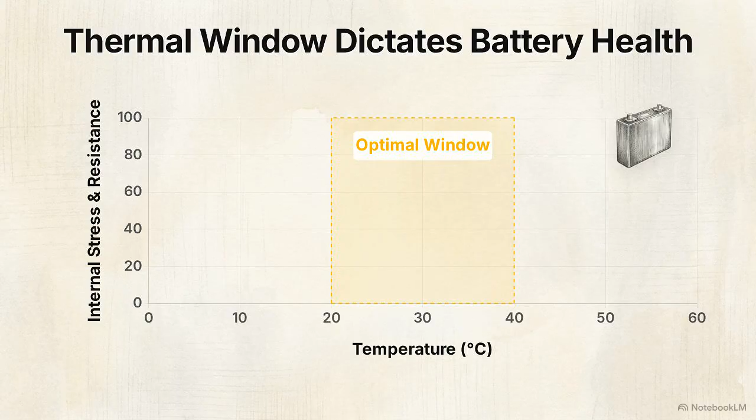Lithium-ion cells operate reliably within a specific thermal window, between 20 and 40 degrees Celsius. Temperatures below this range spike internal resistance, while temperatures above it initiate the breakdown of internal chemistry.

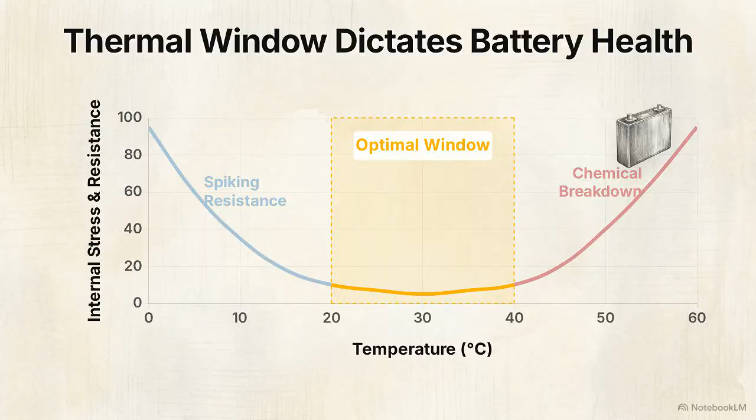Strict thermal uniformity is equally critical. The temperature difference between the hottest and coldest regions of the module, or delta T max, must stay below 5 degrees Celsius to prevent cells from aging at different rates and creating pack-level imbalances.

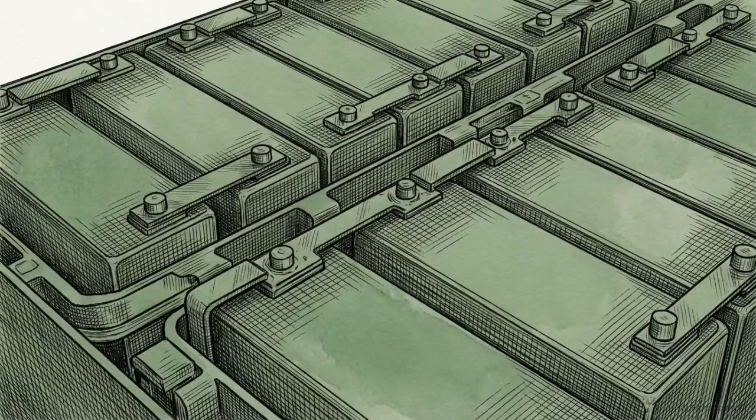Pushing a cell beyond these boundaries triggers immediate degradation. High heat accelerates side reactions that permanently thicken the solid electrolyte interface layer on the anode, stripping the battery of its total charge capacity. Left unchecked, this heat accumulation initiates a self-accelerating exothermic reaction.

The internal temperature continues to climb until the polymer separator melts, causing the cell to violently vent flammable gas in a thermal runaway. High-rate fast-charging protocols force massive amounts of current into the cell in minutes.

This generates a thermal load that violates these operational margins, creating a bottleneck that standard single-mode cooling systems cannot resolve.

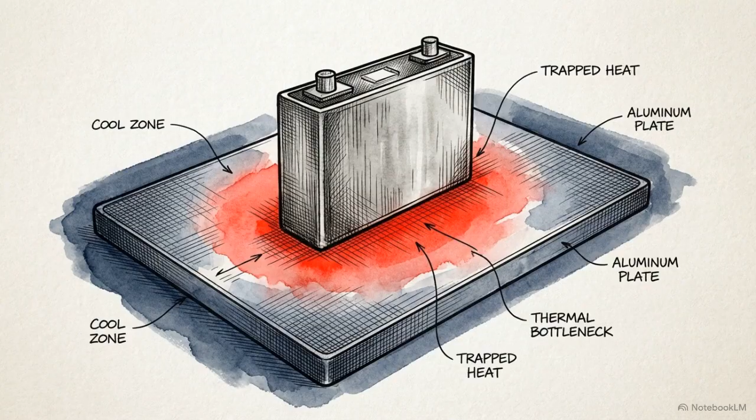Using the Bernardi model, we isolate thermal stressors during 5C discharge. First is irreversible joule heating. As current meets internal resistance, electrical energy converts into a continuous thermal load. Second is reversible entropic heat, produced by chemical reactions, which fluctuates with the state of charge.

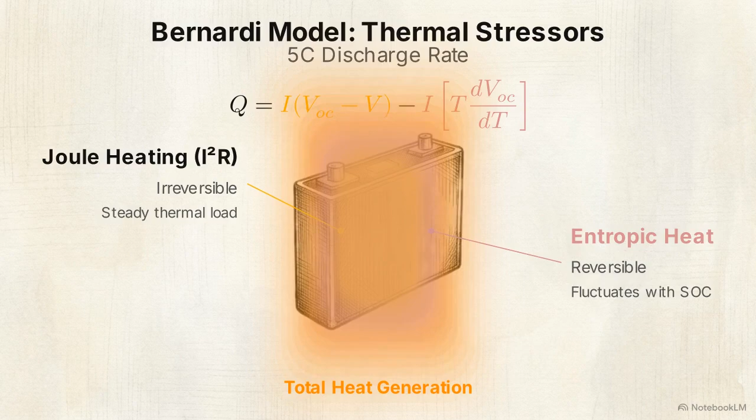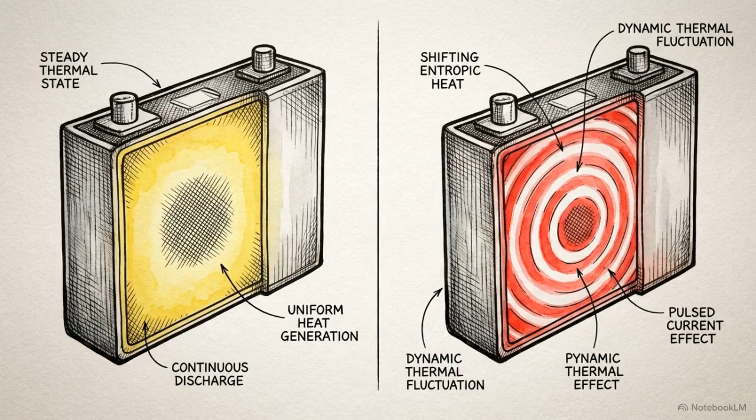Accurately quantifying both the steady ohmic heat and the shifting entropic heat is the required first step before engineering a conjugate heat transfer system capable of dissipating them.

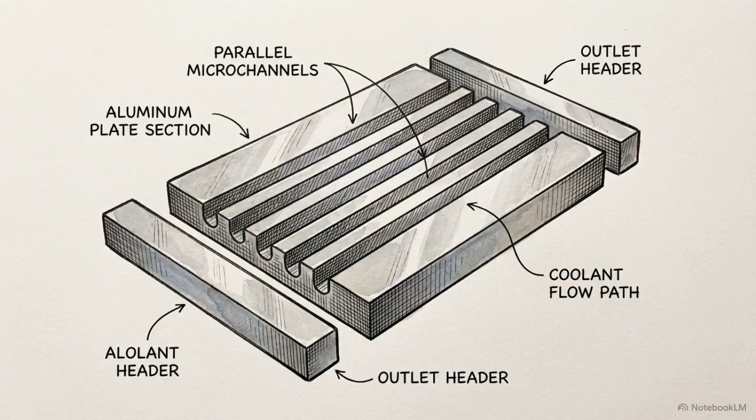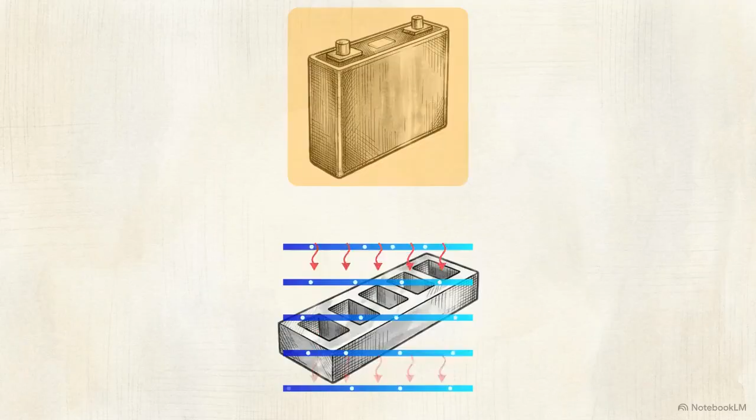Our baseline configuration, Design 1, is an industry-standard monolithic aluminum cold plate featuring 5 internal microchannels. It operates via forced convection. A water glycol coolant circulates through the channels, absorbing heat through the aluminum walls to be rejected at an external heat exchanger. Under high transient loads, monolithic aluminum fails to distribute heat quickly enough.

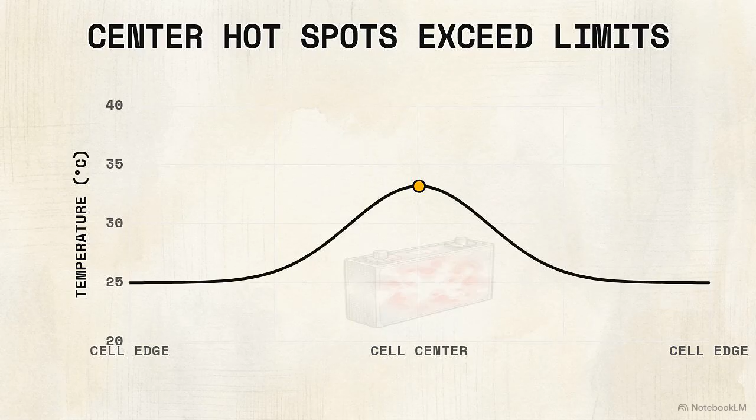Severe, localized hotspots form at the center of the cells, driving the temperature gradient beyond the safe 5-degree limit.

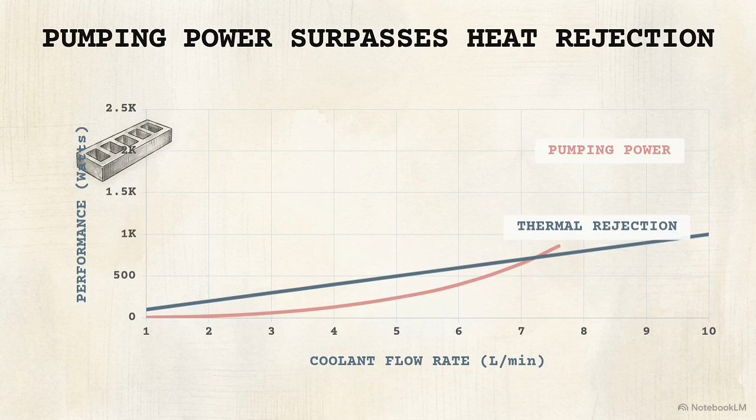The standard engineering response is to increase the coolant velocity. Pushing more liquid through the channels drives heat rejection upward. However, forcing liquid through microscopic channels creates immense hydraulic resistance. The required pumping power climbs exponentially, exceeding the thermal benefits.

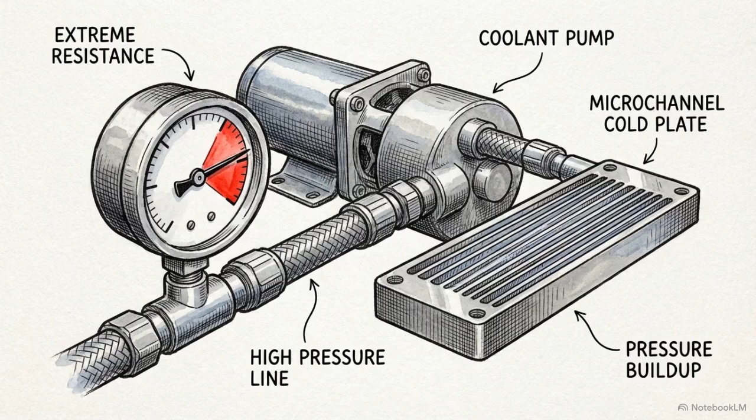This creates a significant parasitic power loss. The battery must expend its own stored energy to power the pumps, directly reducing the vehicle's total effective driving range. Brute force fluid velocity is an inefficient way to manage transient heat spikes.

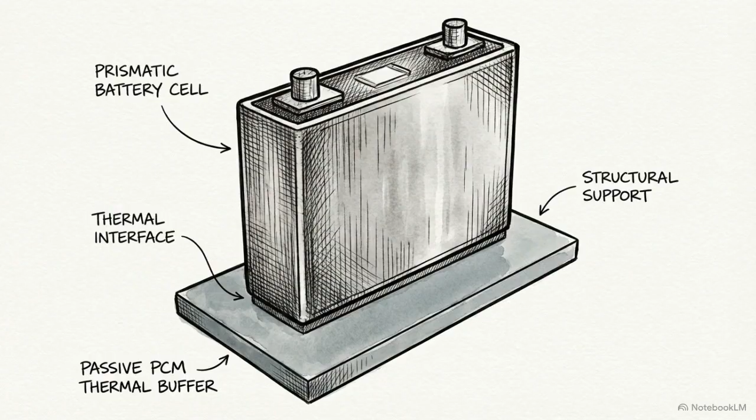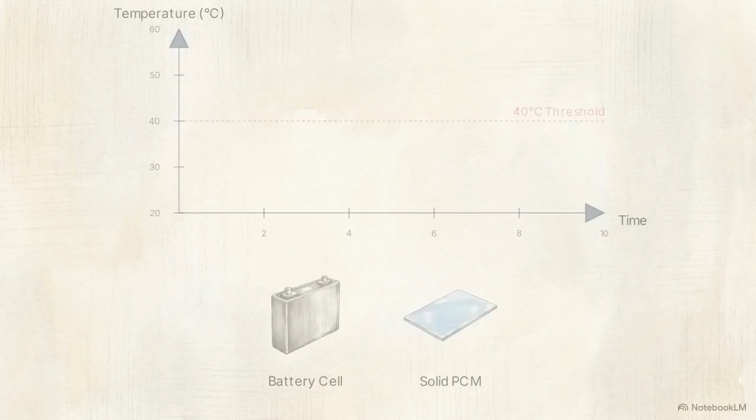The system requires a passive thermal buffer to handle the initial thermal shock without draining battery power. We integrate a 0.5 mm layer of phase change material directly between the battery cell and the cold plate to act as that buffer. As the battery heats toward the 40-degree threshold, the material transitions from solid to liquid.

On a temperature graph, the rising curve flattens into a plateau. This isothermal buffer absorbs large quantities of latent heat, artificially clamping the battery's surface temperature during aggressive discharge.

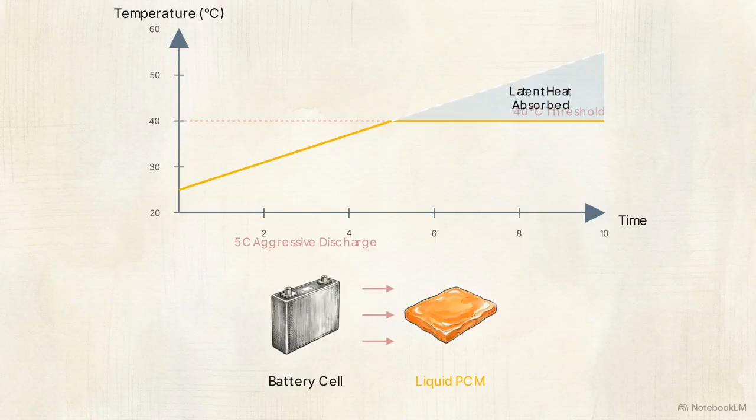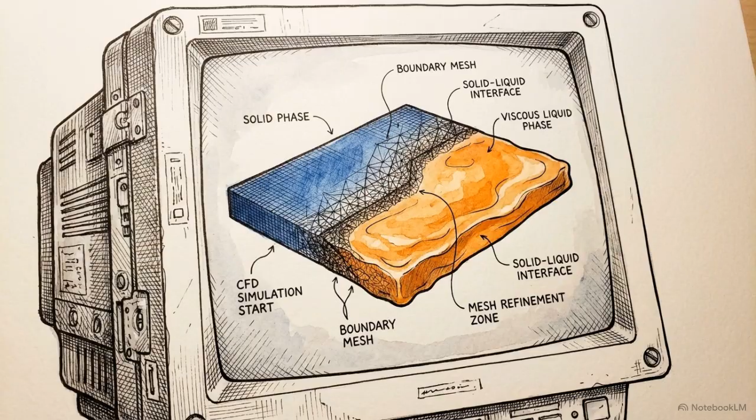Explicitly tracking this moving solid-liquid boundary, known as a Stefan problem, is too computationally intensive for a full 3D battery module simulation. We solve this using the apparent heat capacity method. By modifying the specific heat equation, we mathematically distribute the latent heat over a narrow temperature range, ensuring a stable numerical solution.

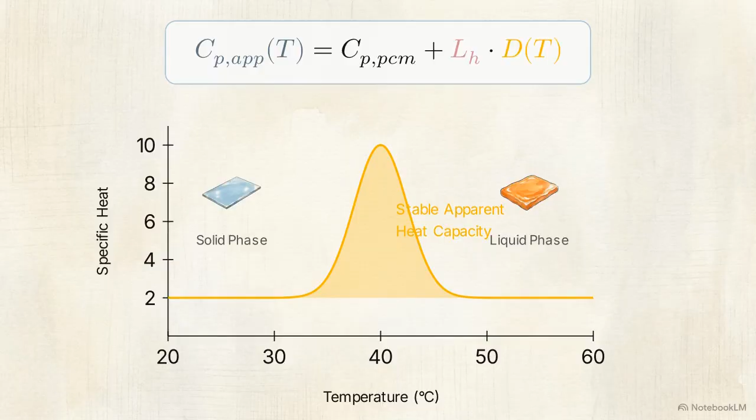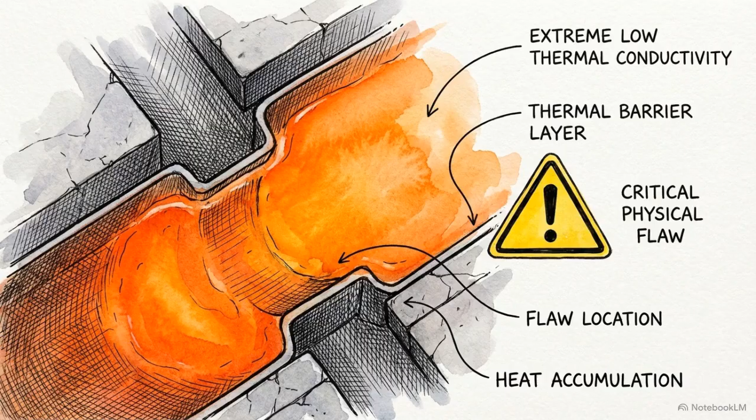The simulation reveals a critical physical flaw. Once the material fully transitions to a liquid, its thermal conductivity drops to just 0.2 watts per meter Kelvin.

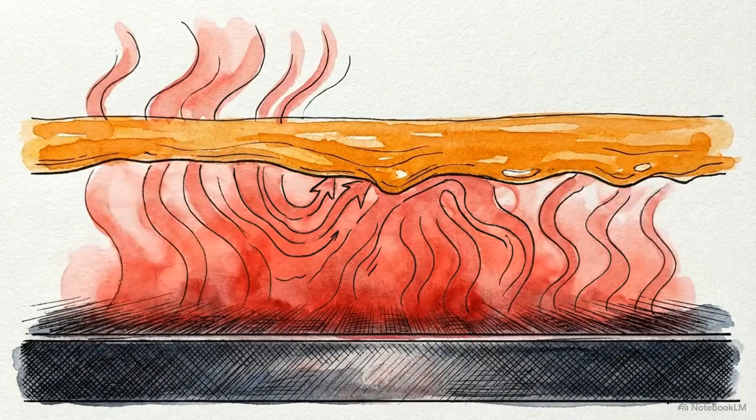In this state, the liquid material becomes a thermal insulator, trapping residual heat against the battery casing and preventing the coolant from reaching it. While the phase change layer successfully absorbs the initial thermal shock, it will eventually cause the battery to overheat unless it is paired with a highly conductive frame to extract the heat and re-solidify the buffer.

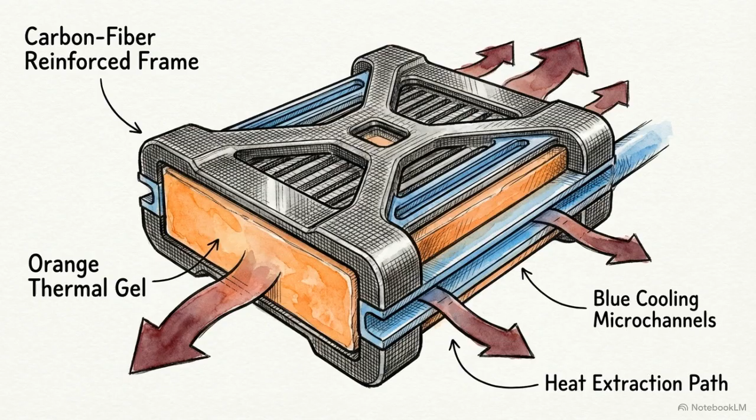This leads to Design 3. We replace the monolithic aluminum with a graphite fiber reinforced aluminum cold plate, which encapsulates the phase change material.

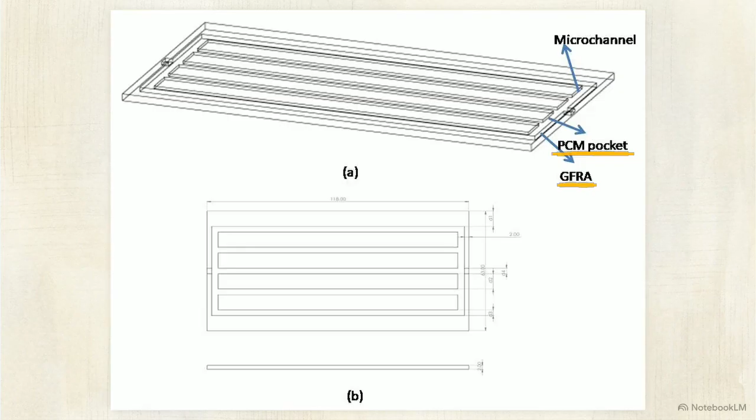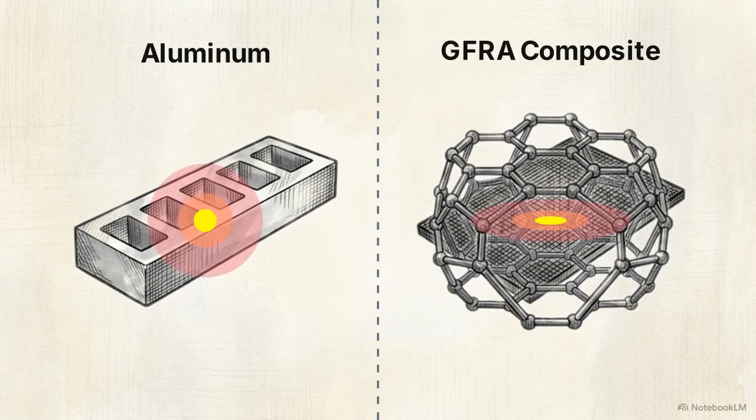This composite is defined by its anisotropic thermal conductivity. Unlike aluminum, which transfers heat uniformly in all directions, the composite's thermal properties change depending on the axis of the graphite fibers. Along the horizontal X and Y planes, the graphite fibers provide a conductivity of 240 watts per meter Kelvin,

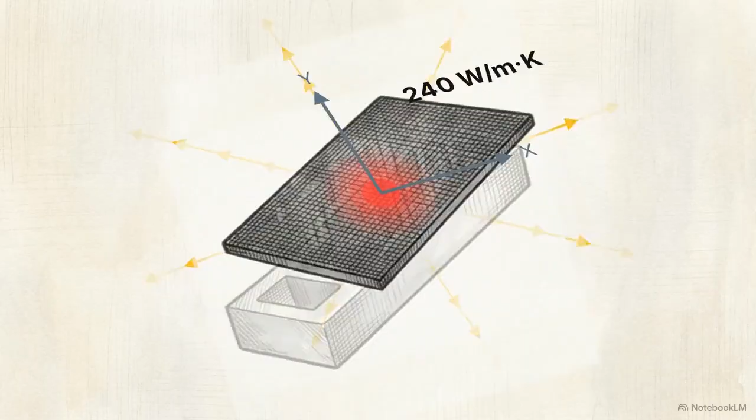pulling heat laterally across the plate. Simultaneously, the composite meters heat downward through the z-axis at a steady 30 watts per meter Kelvin into the microchannels.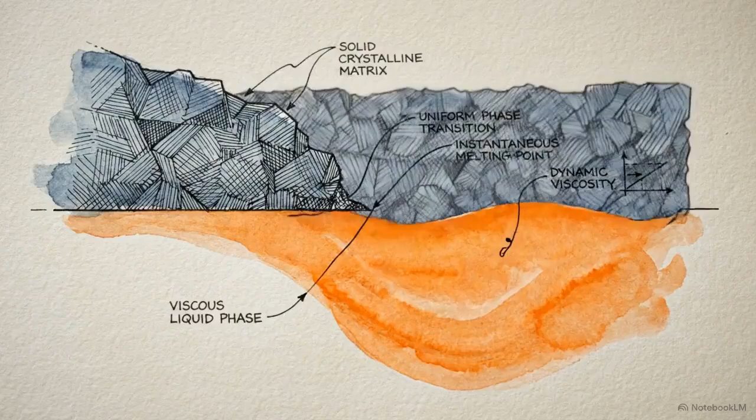This lateral spreading eradicates localized hotspots instantly. By distributing the heat, the composite ensures the entire volume of the phase change material melts at the same time,

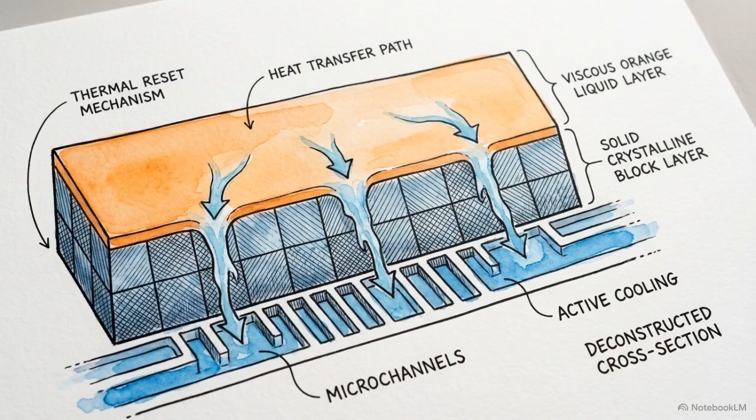maximizing the buffer's effectiveness. The liquid microchannels then continuously drain the heat from the composite, allowing the phase change layer to re-solidify and reset for the next dynamic load.

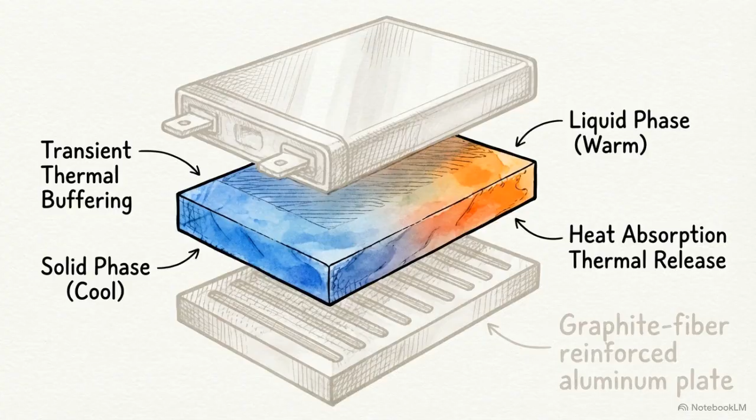By assigning specific thermal duties to separate layers, lateral spreading to the graphite, transient buffering to the PCM, steady rejection to the fluid, the system manages dynamic loads without the parasitic power spike required by conventional pumping.

We compared the thermal performance of the baseline aluminum plate and the hybrid composite architecture during a continuous 5C high-rate discharge. The CFD results show Design 1 reaching localized thermal saturation, while Design 3 maintains a dispersed thermal equilibrium.

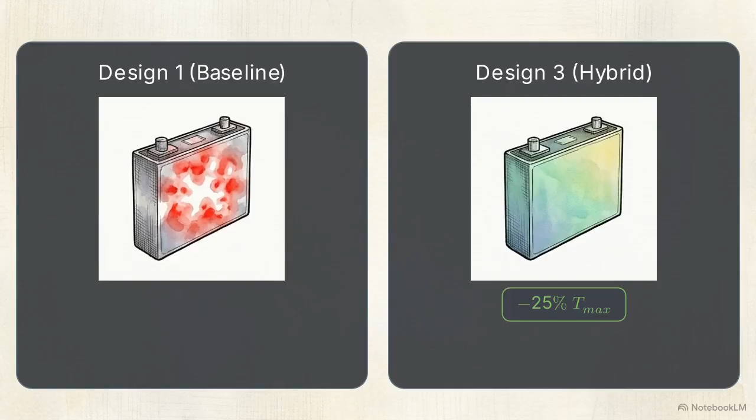The hybrid achieved a 25% reduction in maximum temperature compared to baseline and a 30% improvement in uniformity, keeping the gradient below the 5-degree threshold.

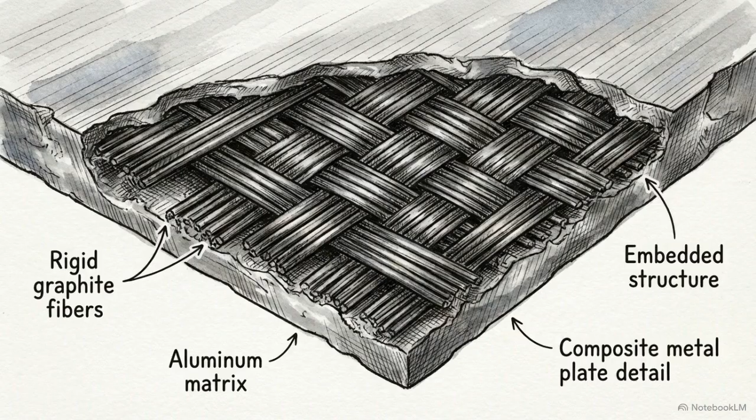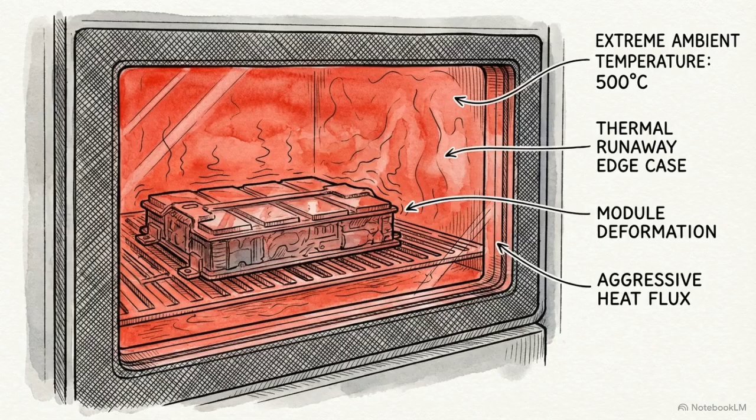These results demonstrate that managing high power density requires shifting focus from fluid velocity to the precise engineering of thermal impedance through composite materials. To test the limits of the design, we ran a final edge case simulation, an aggressive 8C discharge rate in a hostile 45 degrees Celsius ambient environment.

In these conditions, internal heat generation is compounded by inescapable environmental heat. This combination typically triggers the chemical breakdown that leads to thermal runaway.

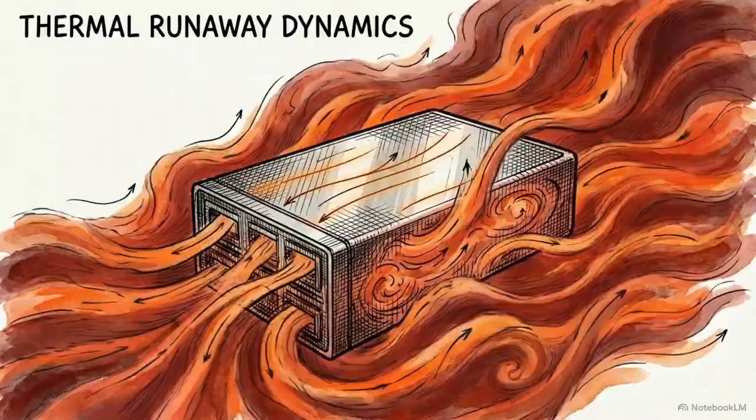The GFRA and phase change system successfully halted the cascade, maintaining a maximum temperature difference below 17 degrees. Even when active cooling is overwhelmed by ambient conditions, the multi-layered architecture provides a physical barrier that protects the internal chemistry of the cell.

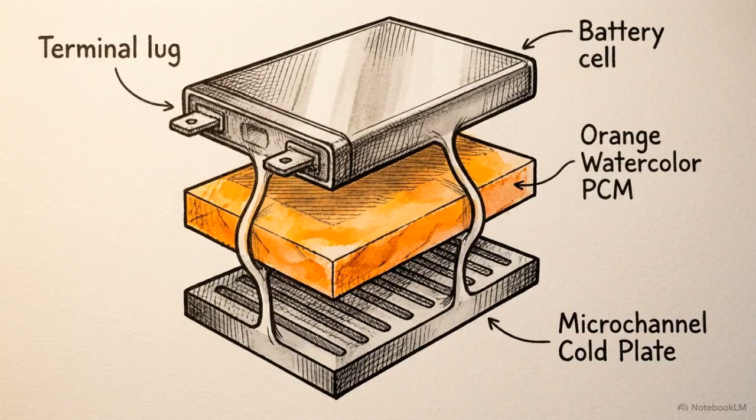This multi-layered conjugate heat transfer architecture provides the safety margin necessary for lithium-ion modules to survive the extreme thermal stressors of high-rate fast charging.